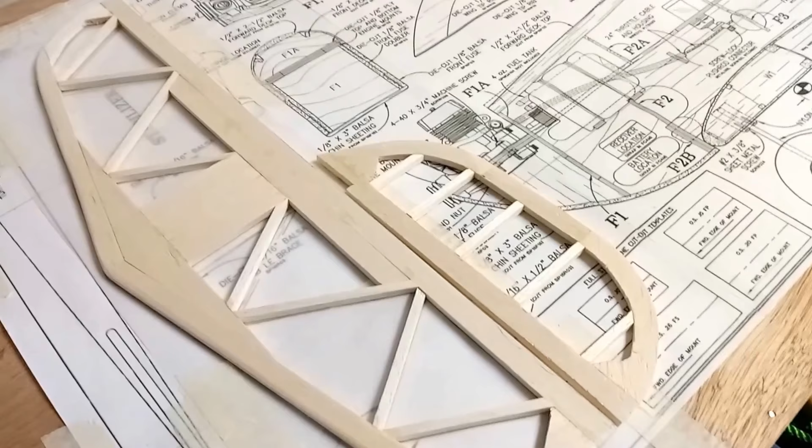Hello and welcome to the latest video on the build of the Slowpoke. Things have gone considerably better since my false start from my last video. I've managed to make most of the horizontal stabilizer and I've made one side of the elevator. I'm very pleased with how this has progressed.

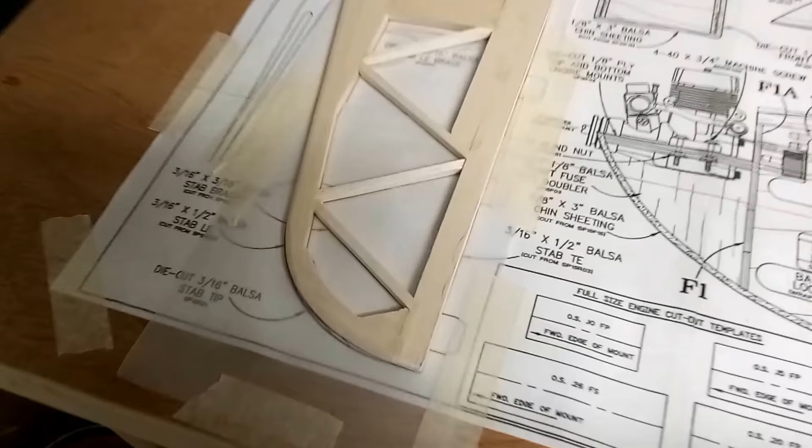It has been a little bit of a trial to get this started, but now I've got my head around how this should be built and how the wood needs to be cut. I'm much more confident in actually proceeding. I think I discovered a lot in how to build this plane from doing the horizontal stabilizer first before I actually set about doing the elevator.

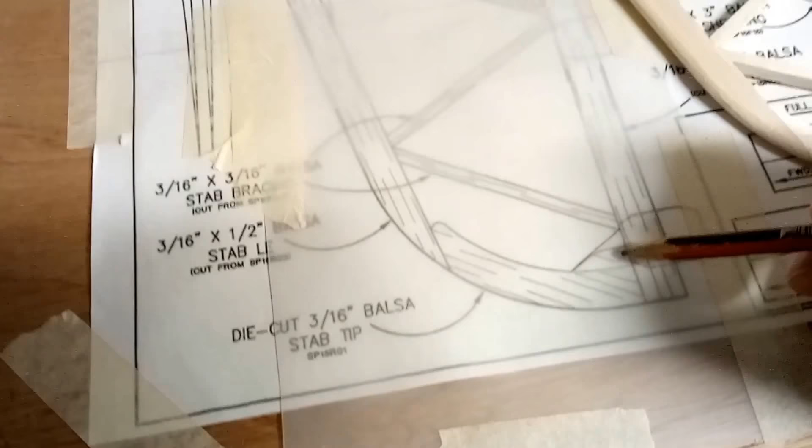The reason I say this is because a lot of these components have fairly unusual and complex curves which are pretty much unnecessary. This plane itself was designed as a kit, so a lot of these components with their curves on them would have been either laser cut or punched out. So the plans still show these, but it's largely unnecessary.

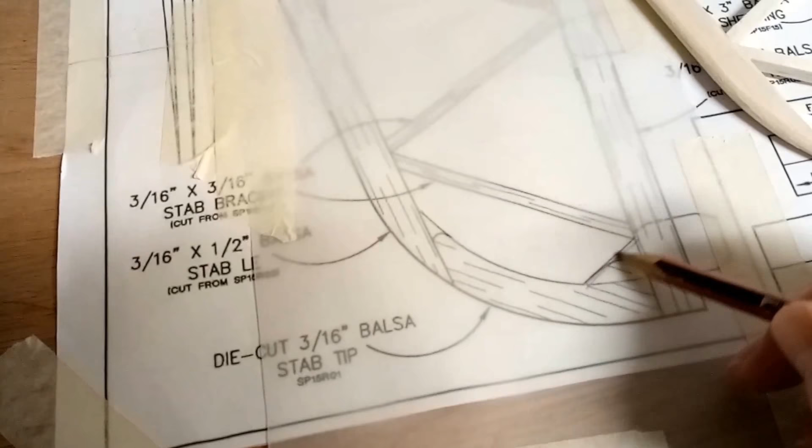So what I've done is simplified them by just straightening up the edges and making it a lot easier to cut out of the sheet balsa wood. And that's then reflected in the final component. It shouldn't affect the weight too much, and it shouldn't affect the performance of the components too much either, and it just gives a much neater finish to the horizontal stabilizer by doing that.

And I've done a similar thing on the elevator as well. I've just straightened out a lot of these edges which were again having these complex curves in them, so I've just straightened that like that.

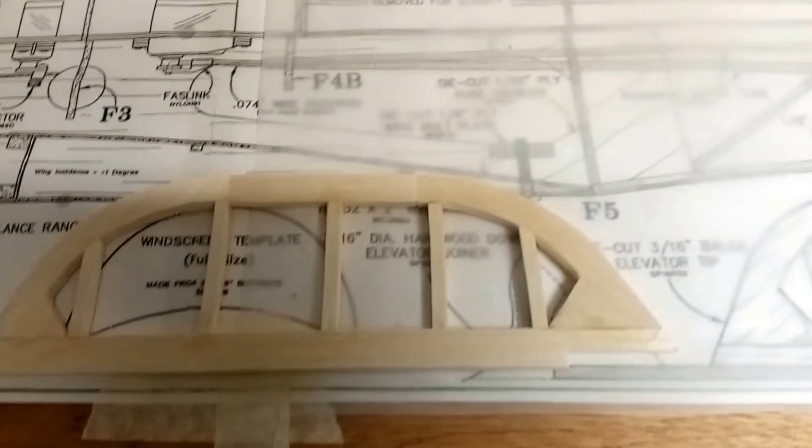So my next task will be to make the other half of this, which will be flipped this way. And then I'll put in the joiner across the bottom and do a final sand, round off the edges, and then I will start thinking about moving on to the fin and the rudder.